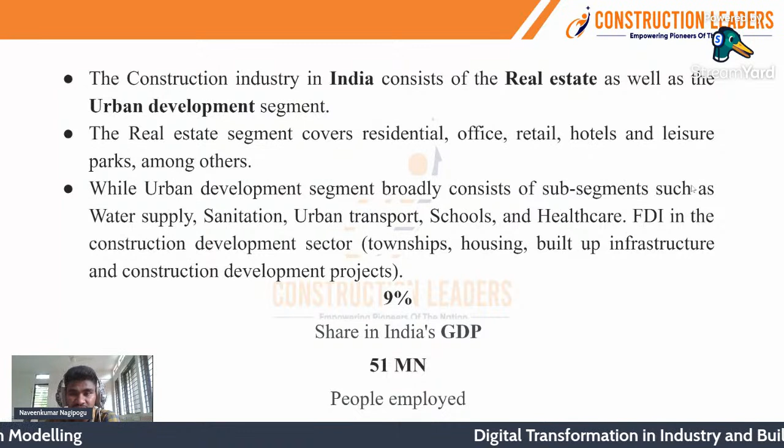That's really huge. When we talk about industry sectors in the AECO industry, we have residential, non-residential, and following sectors. We'll talk in depth about that. Residential sector is simply the place where people usually live.

Commercial is the place where people will be meeting but not living there. For example, commercial hotels, schools, hospitals - people generally meet there for business talk or needful work. They will visit, but they won't stay there.

When it comes to the mixed use sector, this is the place where we can combine the residential, where people live, and the commercial, where people meet for business purposes. That comes under the mixed use sector.

Coming to infrastructure, this is very important to human survival and human connection. Imagine being at a place where you have no access to a road, a bus station, or a railway station, or anything to move from one place to another. Can you imagine that? No, right?

Infrastructure plays a very important role. We can consider roads, bridges, sewer lines, electrical lines, and all of that as coming under the infrastructure sector.

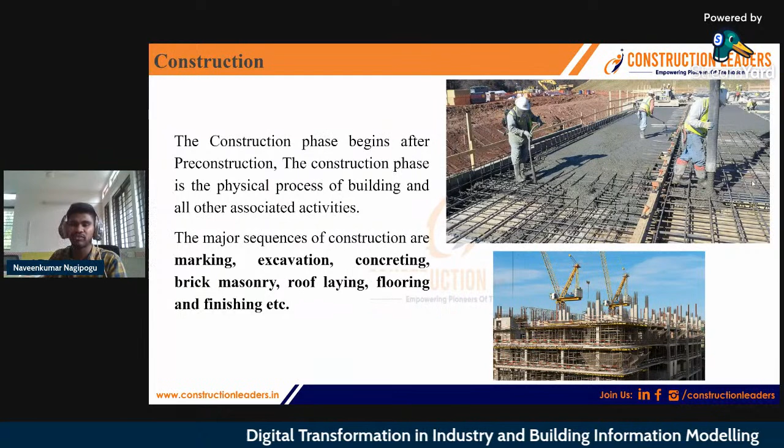That is the construction phase. Coming to post construction, it doesn't mean that as an engineer or contractor you plan a building, design it, construct it, and just leave. No, it's not like that. After the construction of a facility, there's more with post construction, I mean operations and maintenance. That is the phase where you experience the feel inside the building or facility, how you are going to live in it. That comes under post construction operations and maintenance.

And we look into the team. In the AECO industry, if you go to the top view, you will be able to see owners, designers, and contractors typically. Specialty contractors also will be there. And typically we call it a project team, including the owners, designers, contractors.

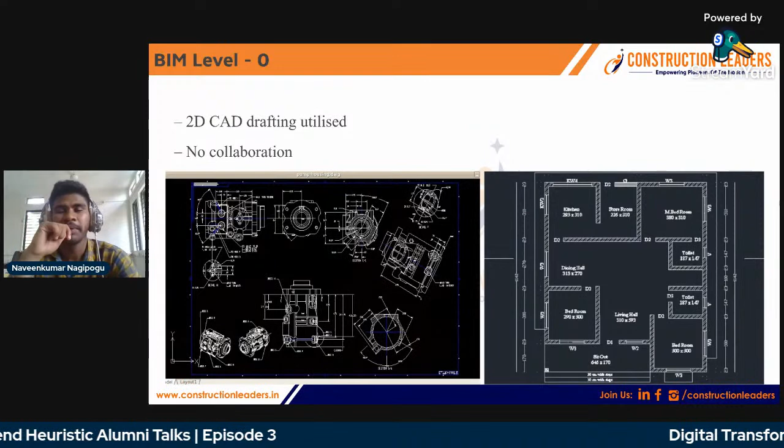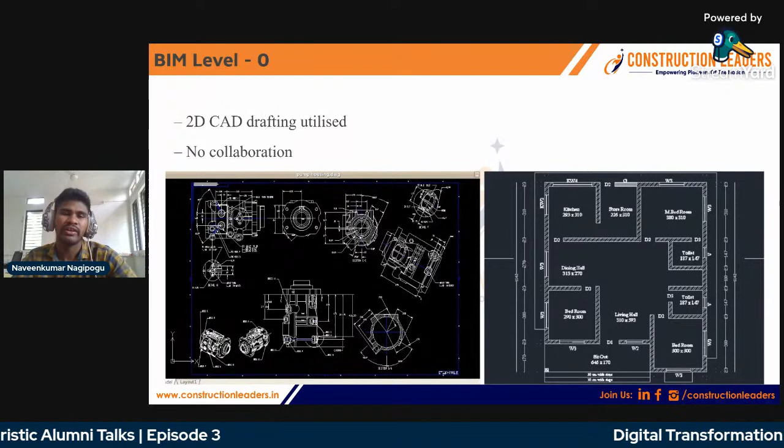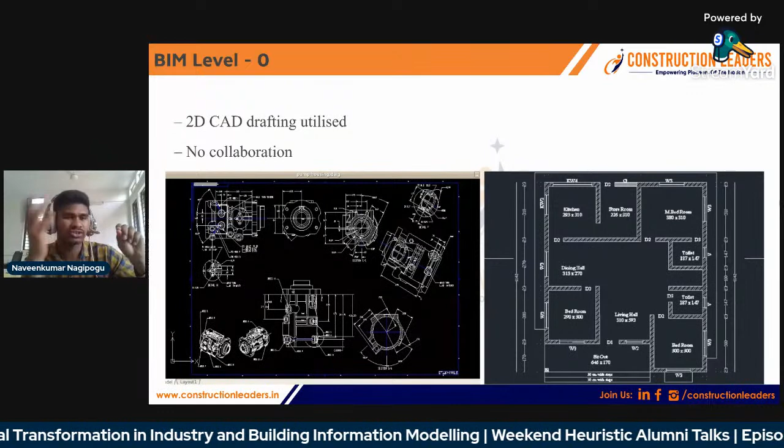BIM level 0 is also called unmanaged CAD. That was the time when people used to plan, design, and do everything on paper, I can say. Then they transformed it to 2D computer aided design or drafting. Then started using AutoCAD. At that time, no two people could work on a single file. Whenever a person is working on one file, there is no such facility or technology which allows another person to work together with them on a single file.

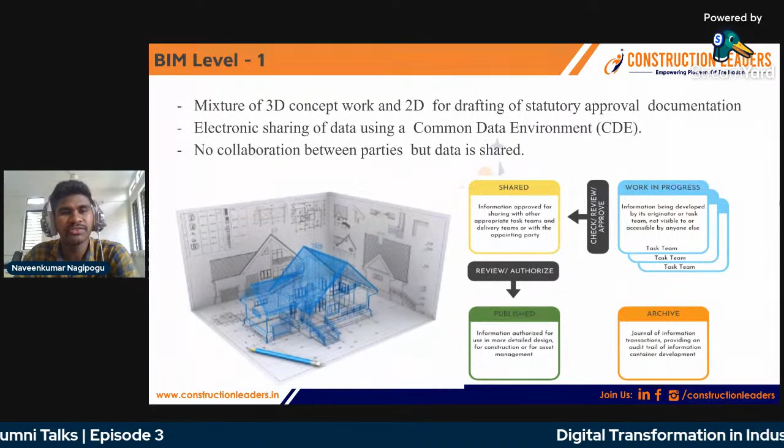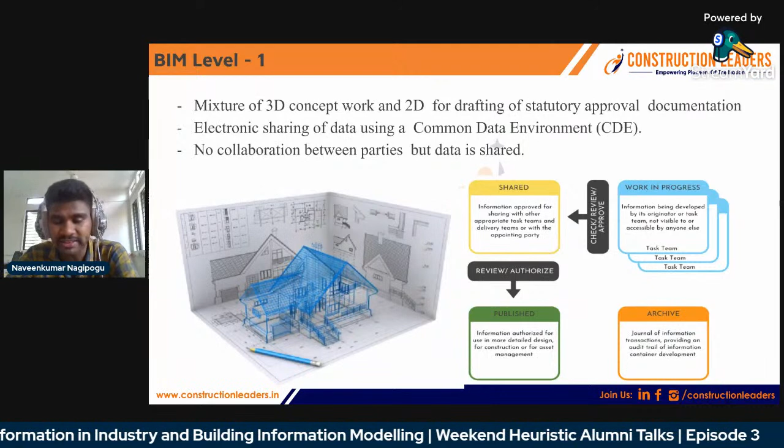So there was no collaboration. BIM level 1 is where the 3D concept evolved and people started developing in 3D also, and obviously from 3D we can extract 2D drawings very easily. That is the level where the CDE, the common data environment, was introduced. At that time also, there was no full collaboration, but data used to be shared.

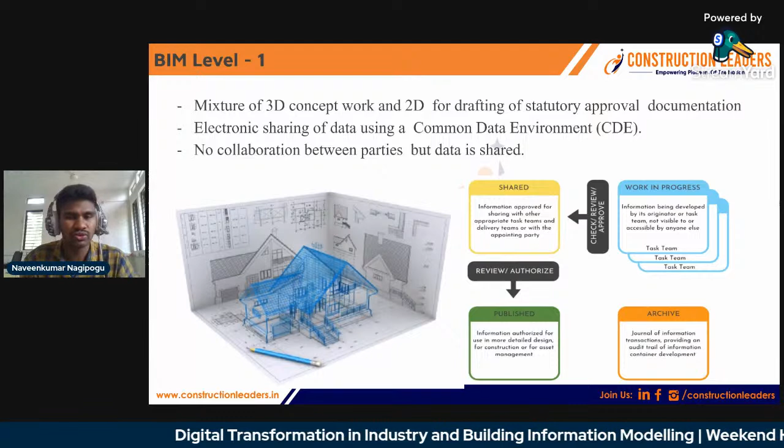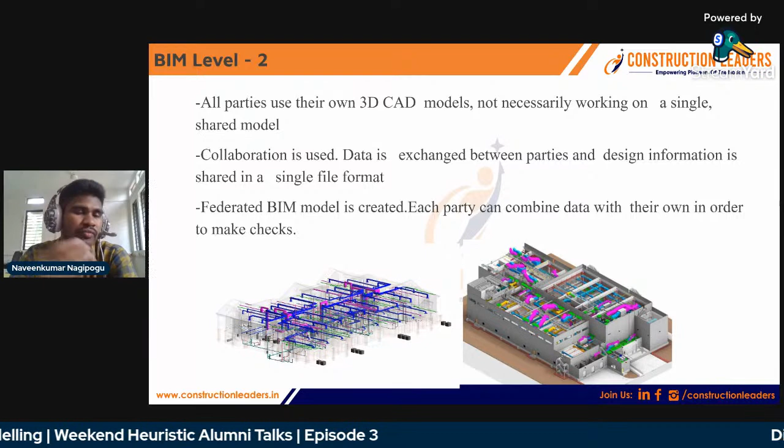Coming to BIM level 2, I can say it is what's happening in the industry right now. We have 3D CAD models, and people are able to work on single files - partially, not fully, partially.

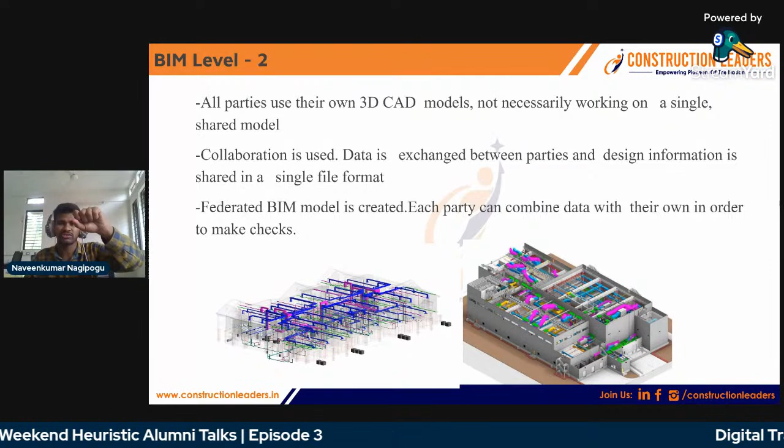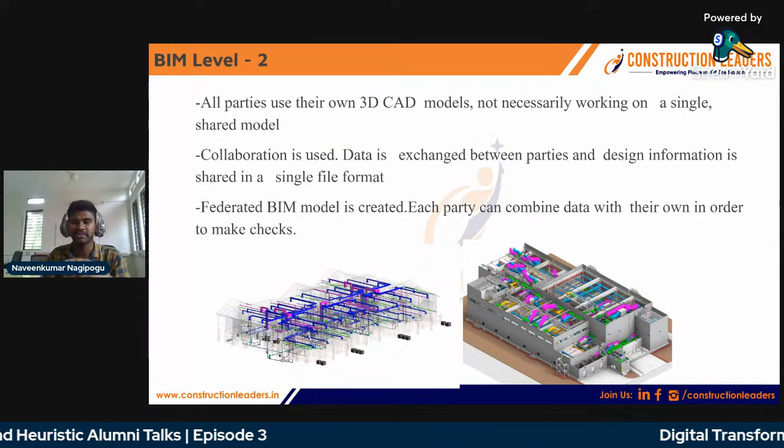What happens in the industry is, it's not like only one person is going to work on a project. We have architectural and different engineers, right? They will be working, say, in a very traditional manner - working independently, and whenever they have to come closer and need to work together, clashes take place. But here what is happening is, before executing any work, before it actually happens in the real world, we can analyze each and everything in a virtual environment.

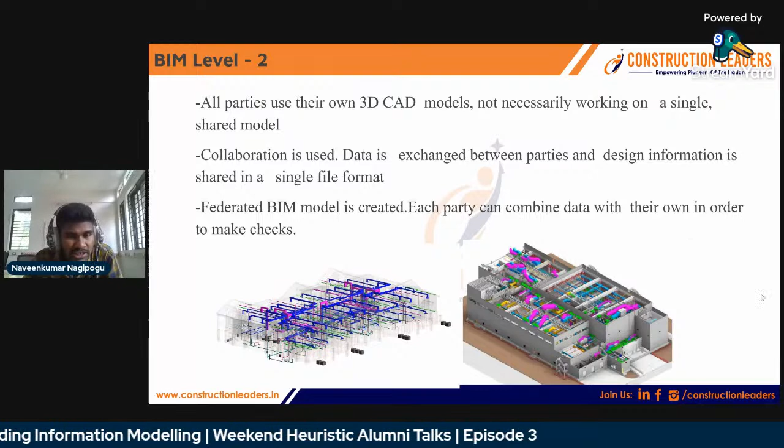Whatever you are seeing in the first picture, say this one, that is related to mechanical and electrical. Electrical in terms of panels will be there, electrical components and wiring, everything will be there. And mechanical will be having HVAC - have you ever seen the ducts? Yeah, used for air conditioning, to distribute the conditioned air in the rooms and places. Ducts will be there. These are all separate. Only one person is not going to design everything. Whenever the work is being done independently, they have to coordinate, right?

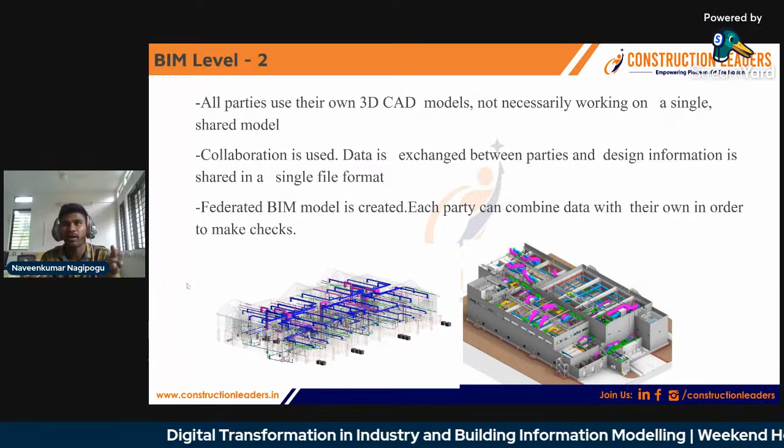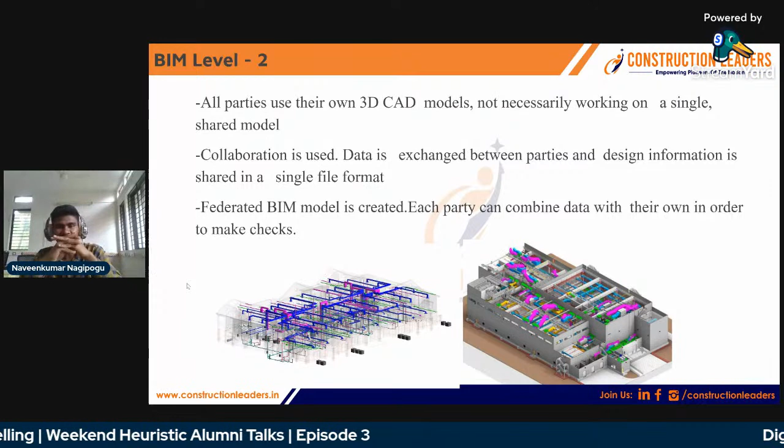That is the place where, in a BIM software platform, we will be merging each and everything: the architectural model, the structural model, and the electrical, mechanical, each and every model we will be merging there. We will be coordinating there, and that model is called a federated model.

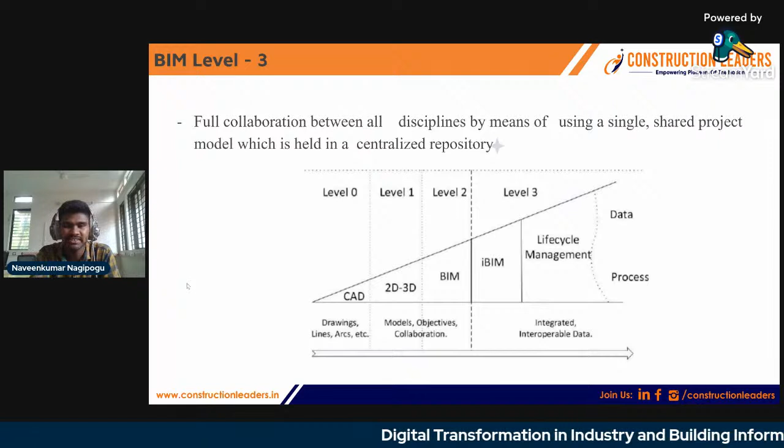Coming to level 3, full collaboration between all disciplines, I can say it is like open BIM. There is no definition which is fully agreed on this. People are saying it is the future. Soon we are going to witness this, and after the maturity levels we will go for BIM dimensions.

We have dimensions from 3D to 10D also. 8D, 9D, 10D are also there, but not in full exploration stage. Right now we are able to implement up to 7D. Of course, maybe somewhere people are implementing 8D also.

And 3D, we know, right? When we talk about 2D, we have X and Y. After 2D comes 3D, where we will be having X, Y, Z also. We will be able to see the 3D model from each and every direction however we want, and each and every element in 3D.

Coming to this fourth dimension of BIM, it is not 4 dimensions, it is the fourth dimension, where we will be having the time and schedule along with the 3D model. We will be linking the time schedule into the 3D model. I won't say it is only a 3D model, I can say it is an intelligent 3D model.

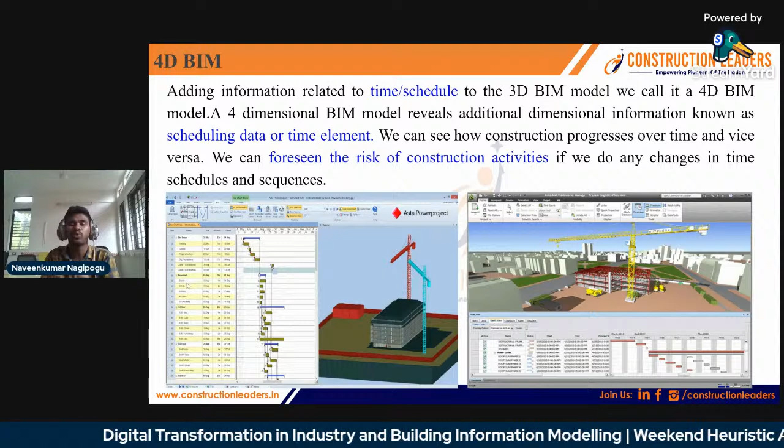Once you step into the industry and start working on real life project problems, you will come to know everything along with the time, how the progress of construction work is going. Say in the next 3 months or the next 3 years, what will be the progress of our project. With the help of the schedule and sequencing, we will be able to witness that before actually constructing the project.

In real site. And 5D BIM, I mentioned the cost and estimation, right? Do you know how traditionally quantity estimation and takeoff is done? If you know, that's great. Here the 5D BIM plays a very important role in automatic extraction of the cost and the quantities. We will be having the 3D model of the building or facility, and obviously we'll be having each and every component related to the building. Then it will be easy to just extract it in a very easy manner.

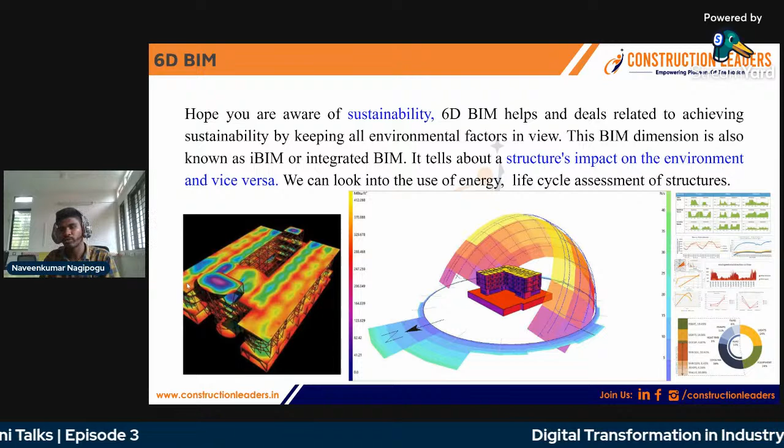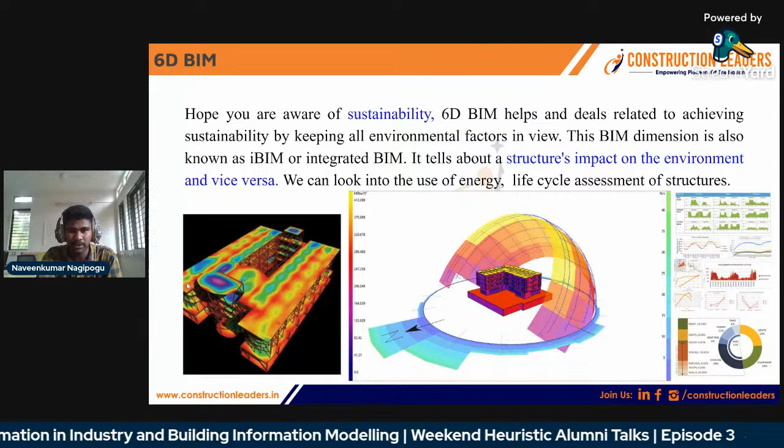And 6D, it's more about sustainability and how the environment is going to impact your structure, or what will be happening to your structure, or the energy which is used by your structure, is that okay or not. We will be talking more about the carbon dioxide also. It's more in terms of technical. Sustainability is playing a very important role, and this is one of the trending topics in the industry.

7D BIM is more about the operations and maintenance, that is nothing but facility management. I mentioned already, right? It's not only about building a facility and just handing it over. It's more about taking care of the building after the building stage also. You will be having all the data related to maintenance operation manuals in the model itself. That is 7D BIM.

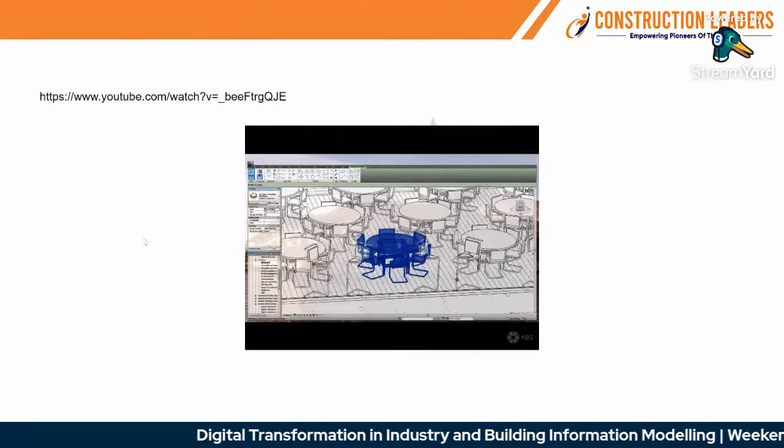I mentioned, right, building information modeling is more about the information which gets inserted into the model. Here we can see the model element and information attached to the model. The software is Revit. See, they clicked on one table and then they are showing the information. That is the beauty of this model.

We have a level of detail and development kind of things also, but that's a different story. Here our focus will be on the information side. Say they clicked on one wall, and what will be the information in that wall, everything will be able to seen here. And that's what the information is. And here they clicked on that.

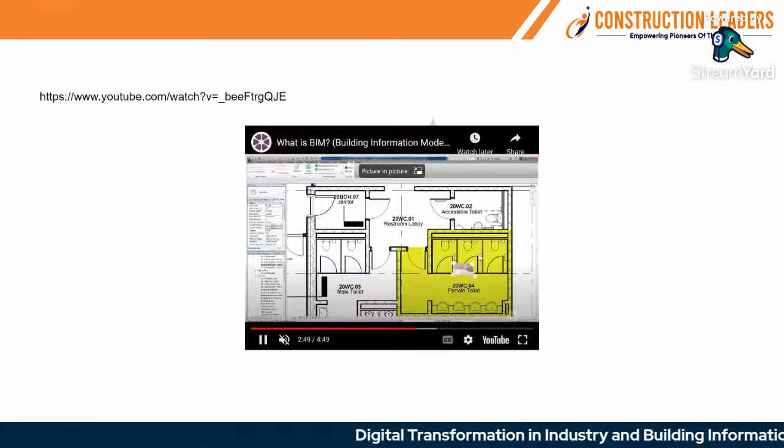I think they are going to click on, they're going to show, yeah, they're showing about the chair. See, that much information this chair will be having. And that is about the roof, what is the material, what is the specification, each and everything we will be able to insert into the model. That is the information.

In part 1, it's more about the concepts and principles, so this time we don't have to worry about these things. In part 2, it's the delivery phase of assets and assessment, and this is very important where we'll be generating all the data related to the project and sharing it. What is there in the standards is how we have to proceed further. What is the process? We are telling BIM is a process, right? What is the process that you have to follow? That will be there in these standards.

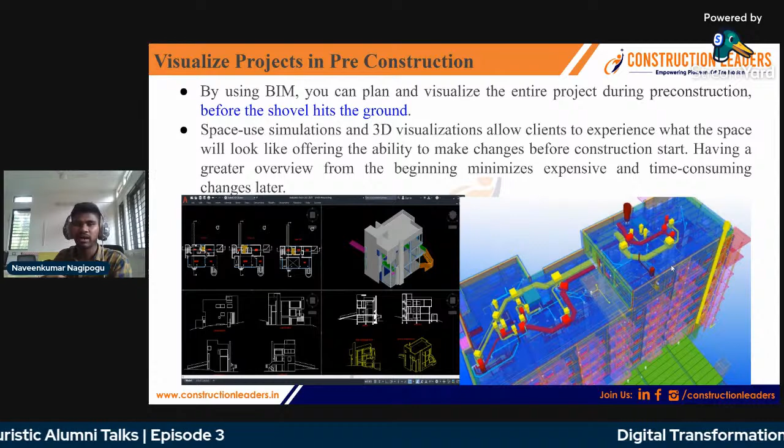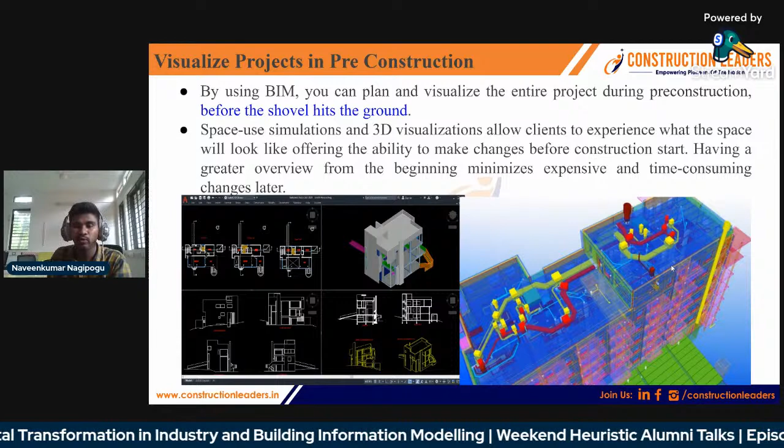Visualize projects in pre-construction. As I mentioned already, we have a design in our hands, and if we implement a 3D model of the same design, then we will be able to visualize that. How it will be in the real environment, on site, how it will be. That's more about the visualization side.

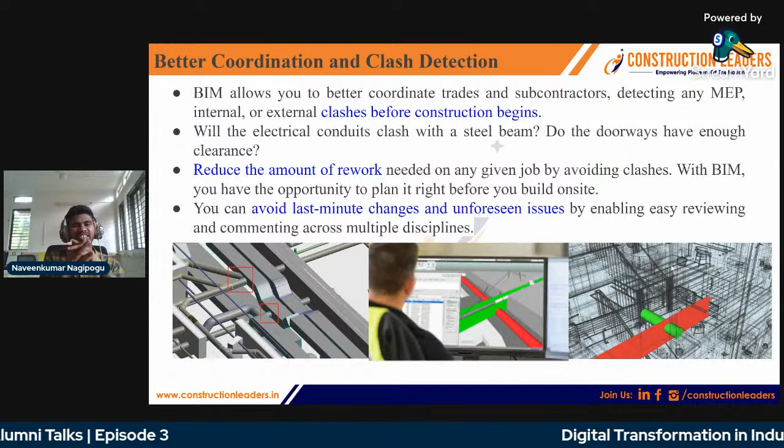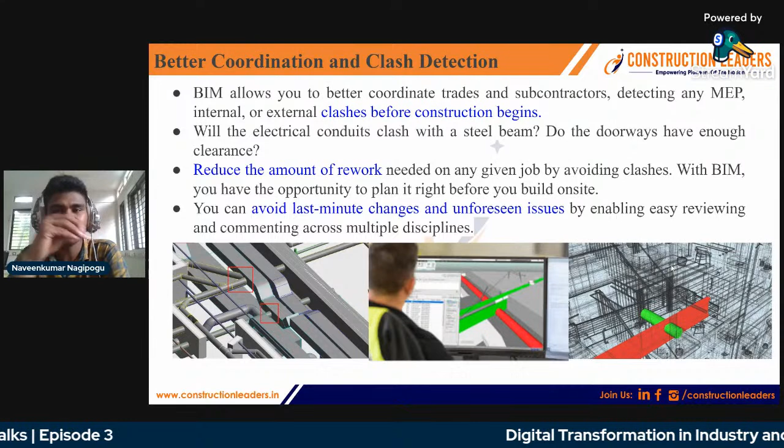Better coordination and clash detection. As I mentioned earlier, we will be having architects, civil engineers, different designers, mechanical, electrical. Whenever we combine all the models into a single model, a federated model, we can say, then we can run the clash detection test. Let's see whether any architectural element is getting clash with the electrical or mechanical element. It's really nice, right?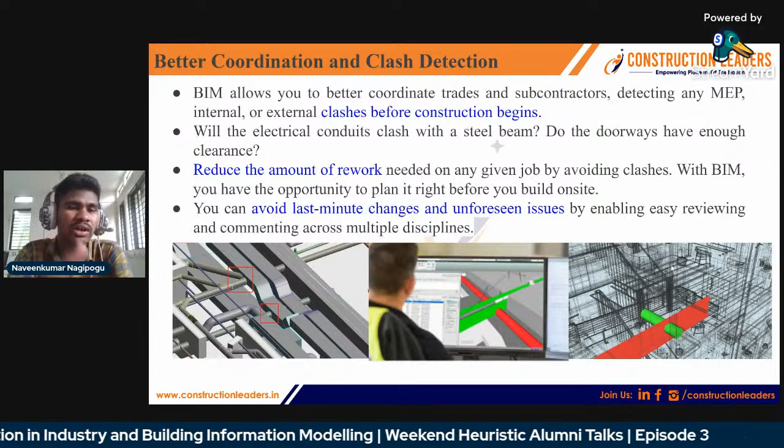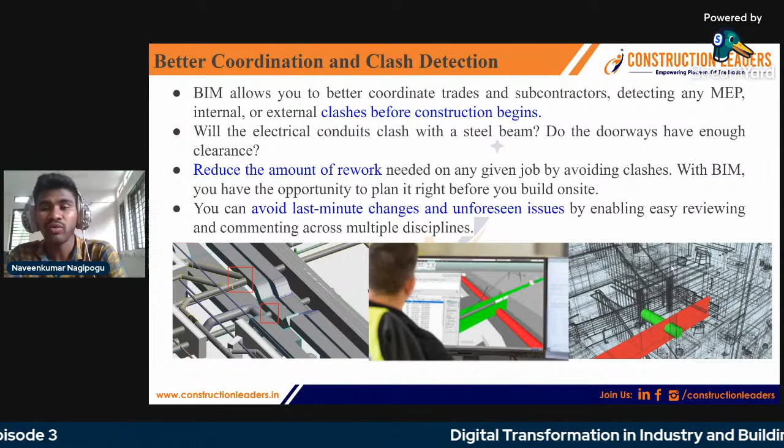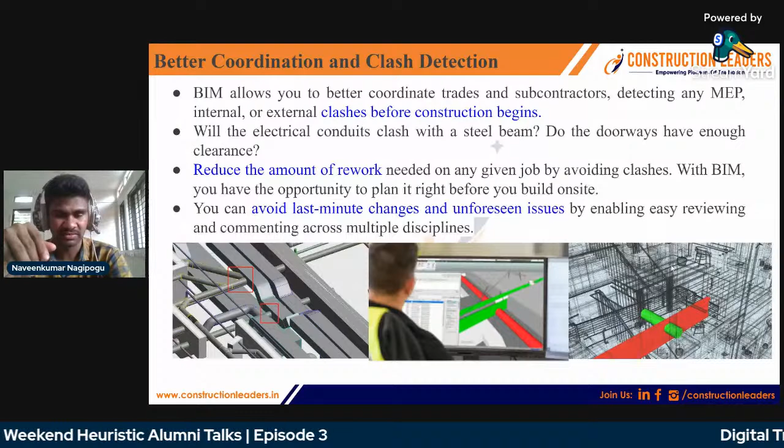What if you face a problem while executing really on site? It consumes your time, money, and each and everything, resources and all. What if we are able to find the challenges, clashes before executing anything? It's nice, obviously, right? It means better coordination and clash detection. If we find that an electrical component is getting clash with a mechanical component, then we'll go to discussion on what is happening there and who has to resolve this issue.

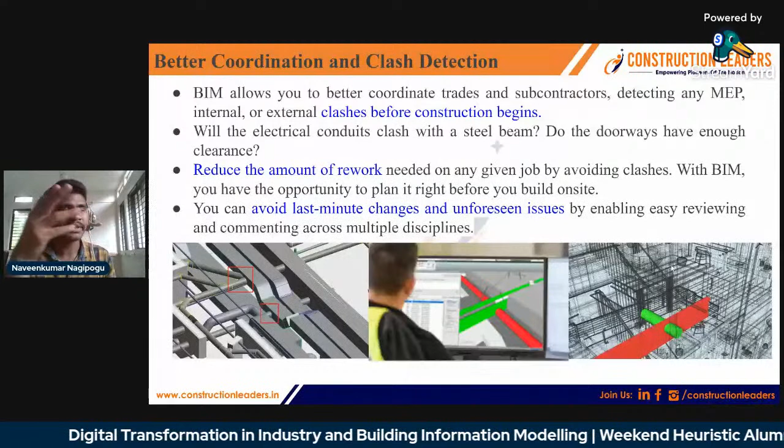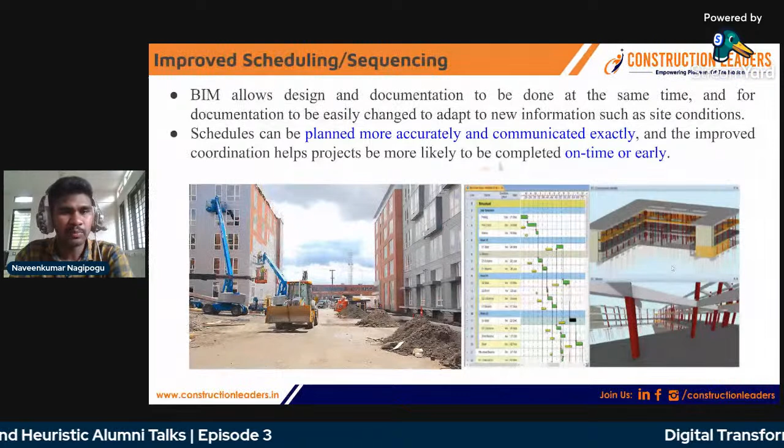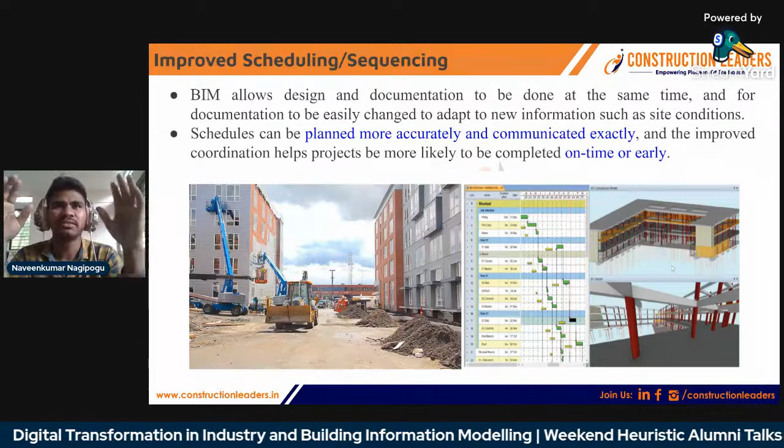Like that, the decision making will be there based upon the results, and improved schedule and sequence. As I mentioned in 4D BIM, we will be able to calculate and visualize what will be the construction progress over the period of time.

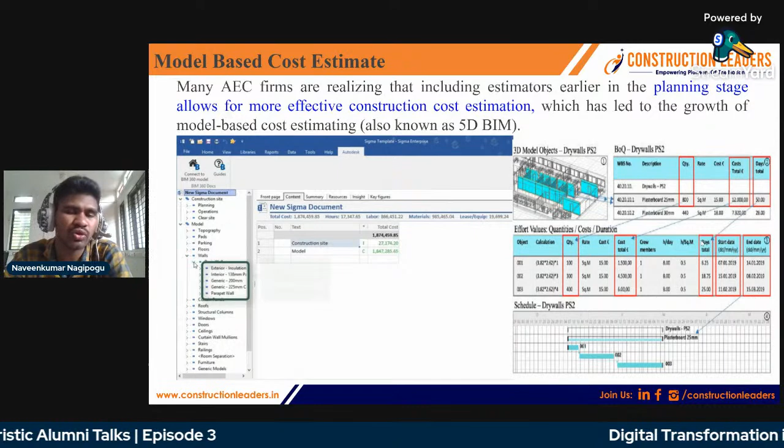Model based cost estimate is about quantity takeoff and estimation. And obviously, I mentioned common data environment, right? That's like a digital space, a central repository for the project where all the documents will be stored and access given to respective teams and people. We can't send a person to the site every single time if anything is needed. That's why this digital space plays a very important role. You can keep your documents and files, and share them with each and everybody, whoever you want, from the central repository. Then obviously people will access the right information at the right time.

Transparency and many more. Whenever we are using a platform or technology like BIM, everything will be computerized. Everything will be happening in front of our eyes, like a transparency, and the documents which will be prepared during the project proposal, tender proposal, and execution plan and all, will be visible to us. Let me give you a simple example. It is computerized, a software kind of thing, platforms we are going to use in BIM. BIM is not a software, but it is supported by various softwares. That way I'm mentioning softwares here, don't get confused.